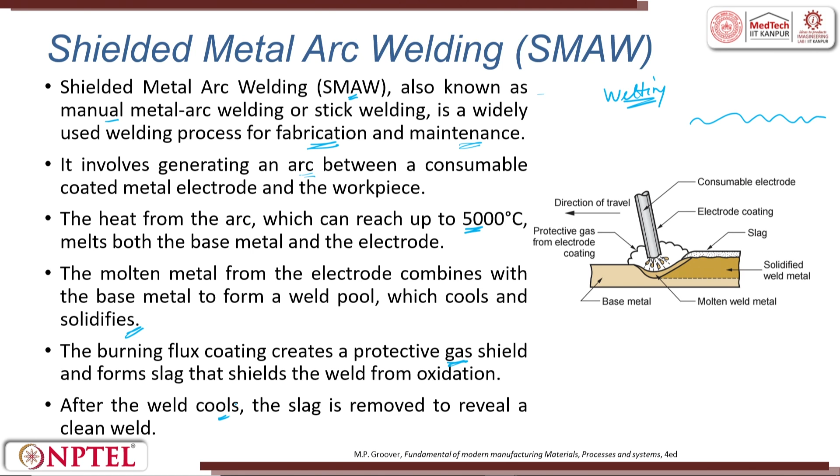A burning flux coating creates a protecting shield, as I said, and forms a slag around the weld. After the weld cools, the slag is chipped off by a hammer.

We have seen this in the beginning, touch start. The arc initiation involves starting the arc between the electrode and the workpiece. Two methods are commonly used. Touch start, as I told you - you touch it and start, then you pull it up.

The electrode is briefly touched to the workpiece, very briefly, for a second, causing a short circuit. The first moment you touch, there is a short circuit, and once there is a short circuit, there is a heat phenomena that raises the current and temperature at the contact point. Why is that important? Because you wanted to initiate the melting. So you touch it, short circuit, heating happens, melting happens, and now you pull it up.

So now you start doing it. This leads to local melting and vaporization of the electrode and workpiece, generating a free electron that ionizes the air, creates plasma, and initiates the arc. Friends, this is very important. There are two methods here. This is touch start, which is very commonly used.

The other one is high voltage discharge. A high frequency unit introduces high voltage into the weld circuit, creating a strong electric field - a high frequency AC unit with variable frequency drives, where you can take high frequency in kilohertz to create a strong electric field. This high voltage pulse initiates the arc without contaminating the electrode, creating the heat phenomena so the current can flow through easily.

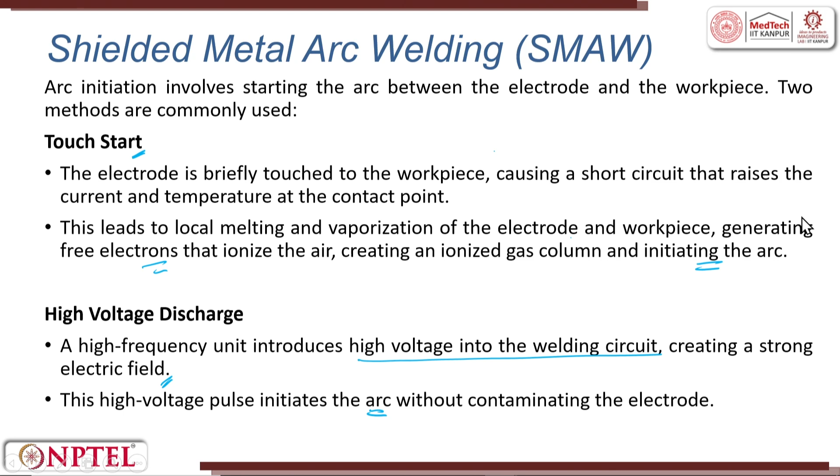The other term is arc crater. This is a small depression formed in the parent metal due to arc penetration, with molten metal piled around it. So you have a small depression, something like this, in the parent metal due to the arc formation, and molten metal piles around it, something like this.

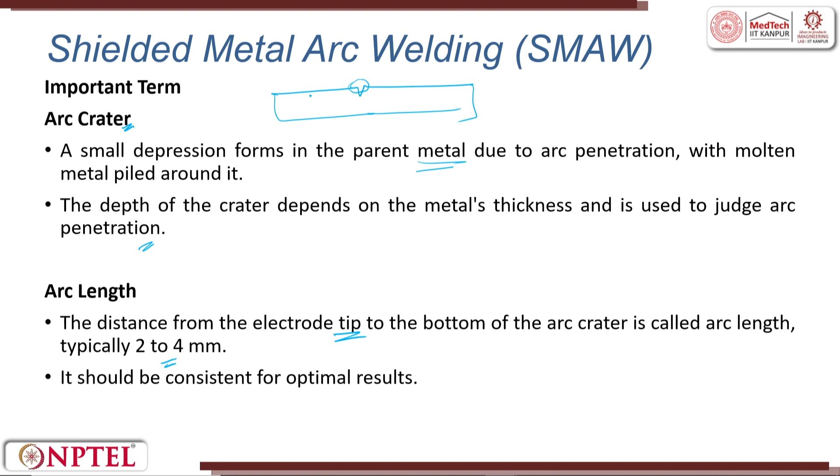The depth of the crater depends upon the metal thickness and is used for judgment of the arc penetration, which is also an important parameter. Arc length we have already seen - the distance between the electrode tip should generally be between 2 mm to 4 mm. Take your scale, 1 centimeter is this much, so 2 mm to 4 mm is too small, right. It should be consistent for optimum results.

The big difference coming in welding when you do manual arc welding is here - consistently maintaining 2 millimeter and 4 millimeter while doing one electrode itself is a challenge. That is why we go for automation. Arc stability.

This shorter length will lead to arc stability. A stable arc, uniform and steady, produces a good weld bead and defect free welding. To maintain the stability, minimum arc variation length is essential. Adding arc stability elements in flux can also help. As seen in the flux example, one is to oxide and the other is arc stability, but predominantly it comes by arc length.

When we talk about polarity, there are two types. When you use DC welding, there is straight polarity and reverse polarity. In straight polarity, the electrode wire you use is negative and the workpiece is positive. In reverse polarity, it is reversed: the workpiece becomes negative and the electrode becomes positive.

In AC, polarity changes periodically within each cycle. It switches as alternating current because it swings positive and negative. This is alternating current, right, so it swings periodically and changes. You can do straight polarity or reverse polarity.

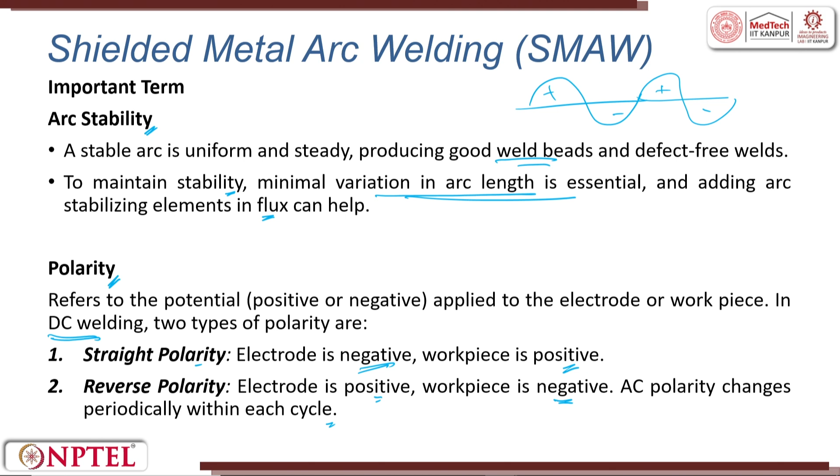Straight polarity has the advantage of deeper penetration. Reverse polarity has the advantage of smearing and spreading without getting deeper. So direct current straight polarity, called DCSP, about 67% of the heat is generated at the workpiece, while the rest is generated at the electrode.

The heating mainly happens because a pool needs to be formed. The electrode need not have very high temperature because the substrate is heavier and has more surface area, leading to more volume, so you need a lot of heat on the base. That is why 67% of the heat gets into the workpiece and 33% into the electrode. Hence bare and medium coated electrodes are used. Deep penetration happens in direct current straight polarity, mostly used for thicker welding joints.

The other way around is direct current reverse polarity. Here 67% of the heat is generated at the electrode, while 33% is given to the workpiece. So when you give heat to the workpiece like this, more melting happens from the surface, creating shallow welding or large surface area welding, which need not give good strength but will give primarily joining only. Hence heavily coated electrodes are used to prevent overheating and melting of electrodes.

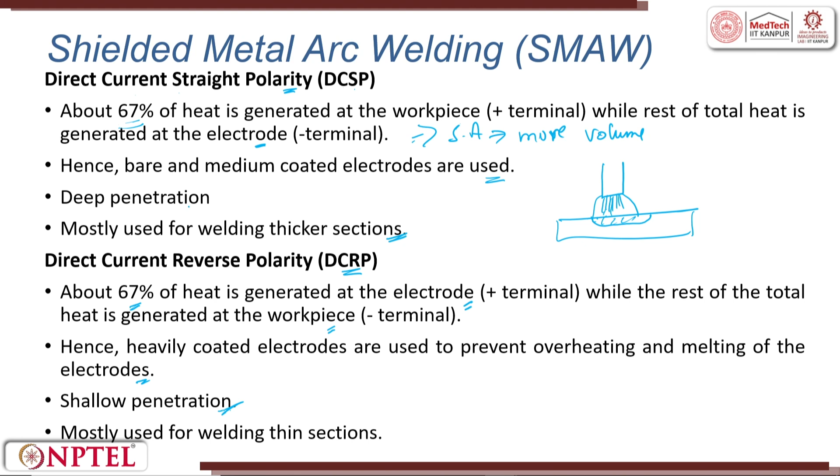So you get shallow penetration versus deep penetration on the surface. Reverse polarity is mostly used for welding thin joints, because in thin joints, if you put very high current, the workpiece itself will melt due to the Joule heating effect, I squared RT. So in that case we try to give maximum heat to the electrode instead. That is what DCRP is used for. DCSP and DCRP are very important, and you should judge whether to go deeper or shallow.

Arc blow: in DC welding, arc blow refers to wandering of the arc due to the magnetic field created by current flowing through the electrode, workpiece, and ground clamp. When there is a very high current flowing, it leads to a magnetic field, and this magnetic field created by the current flow will sometimes disturb the arc.

Once disturbed, the arc, which is a very small thing between the electrode and workpiece, gets affected by this magnetic field, which will not allow the arc to be stabilized and will disturb it. This is called wandering, like a blind man wandering in space. Arc blow refers to wandering of the arc due to the magnetic field, which you did not create yourself; it happens because of the current. Current and magnetic field are linked.

The magnetic field bends the arc from its intended path, especially at the beginning and end of the weld, where the magnetic field concentration is very high. Unlike DC welding, AC welding does not experience arc blow because the polarity changes alternately. So it is a phenomenon more common in DC supply, and we have to be careful.

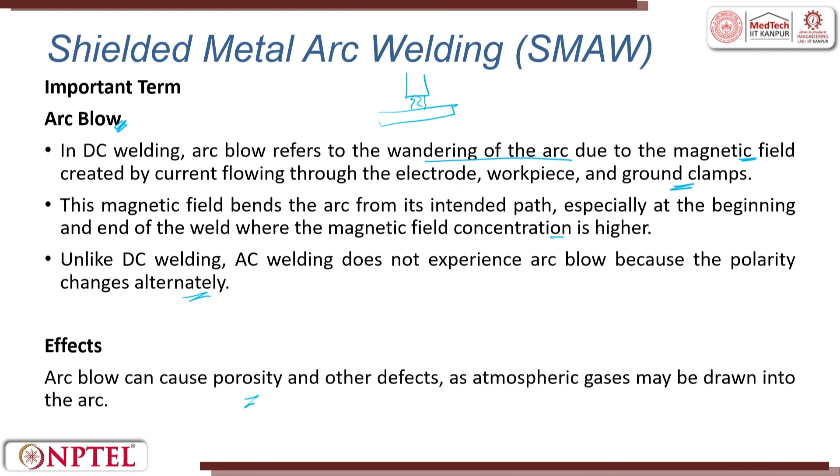So we will try to now look at the advantages and disadvantages. It is simple, low cost, portable, that is why you can use it at any place. It can be used in any position where you want very high weld quality. A variety of electrodes and different materials can be tried.

What is the limitation? The electrode length is a limitation because it depends on the electrode length. Suppose you are halfway through welding and the electrode ends - at that point there will be a discontinuity in the flow of material and solidification. This part would have solidified while this part is yet to solidify because you are manually changing the electrode.

Because of that there can be discontinuity in the material, that leads to cracks. Then it requires cleaning when the new electrode is used, reducing weld speed. Also, controlling is a little difficult compared to metal inert gas welding process, which we will see later.

Where is it used: fabrication, maintenance, repair jobs, shipbuilding, construction industry, gas pipelines - they use manual arc welding. Then buildings, bridges, tanks, boilers, automotive, aircraft - everywhere they use this process because it is easy.

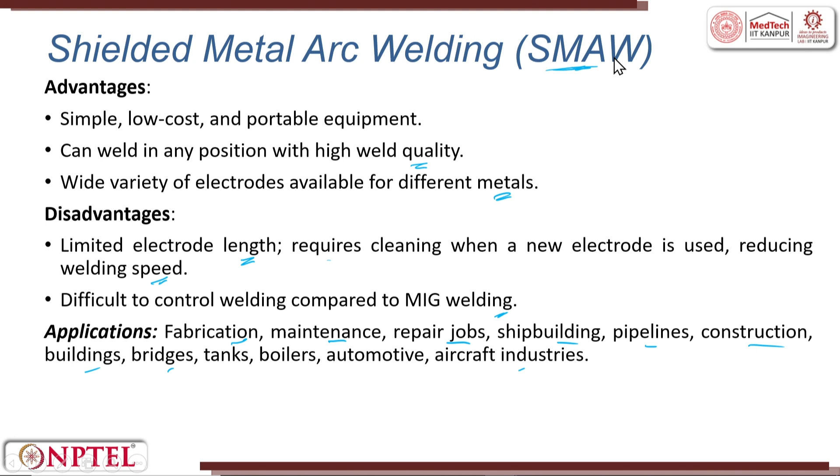If you want to automate it, replace a man by a robot, then you can go with wire feeding. Tungsten inert gas welding, TIG, is also called gas tungsten arc welding process.

Here also there is an arc which is created between the electrode and the workpiece, and the tungsten used as the electrode is not consumable. So we have this base, this is the circuit you hold, there is a shielding gas, and there is a tungsten electrode which is not melting, non-consumable - it does not melt and get deposited.

Second thing, tungsten is too heavy, so if it gets mixed in, it will create a lot of defects in the welding. So the electrodes often contain thorium oxide or zirconium oxide to improve electron emission and arc stability, and allow easy restart at low currents.

So that is the electrode. The filler material is added separately if needed. You can try to heat the base material and join directly, or you can have a filler material in the heated zone which melts and deposits. The filler metal is added separately if needed.

The process is conducted in an inert gas atmosphere so that you do not get any defects on the weld joints - argon, helium, or nitrogen - to prevent contamination of the molten metal pool, with argon being the most commonly used gas due to cost effectiveness and smooth arc action.

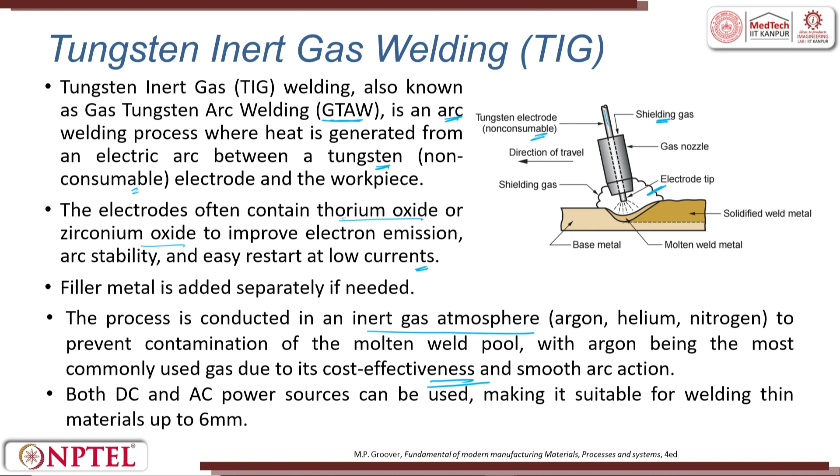Both AC and DC source can be used for the TIG process. So here if you look at it, this is how it is - you have an electrode which is used to create an arc, and then there is a filler rod which flows into the material.

In tungsten inert gas welding, a non-consumable tungsten electrode is mounted in the holder. It need not be heavy, it is one rod and this rod is not consumed, so you do not have to worry about it. Every time, you use one hand to hold the arc and the other to feed the filler, or you can automate the process.

The welding process begins by striking an arc - to generate an arc you have to touch and strike it between the workpiece and the tungsten electrode in the inert atmosphere. You can see here there is an inert gas flowing, the weld gun, and the inert gas flows along with it.

The arc can be initiated either by touching the electrode to a scrap metal piece or by using a high frequency unit, which we saw earlier. Once the arc is initiated, the process continues.

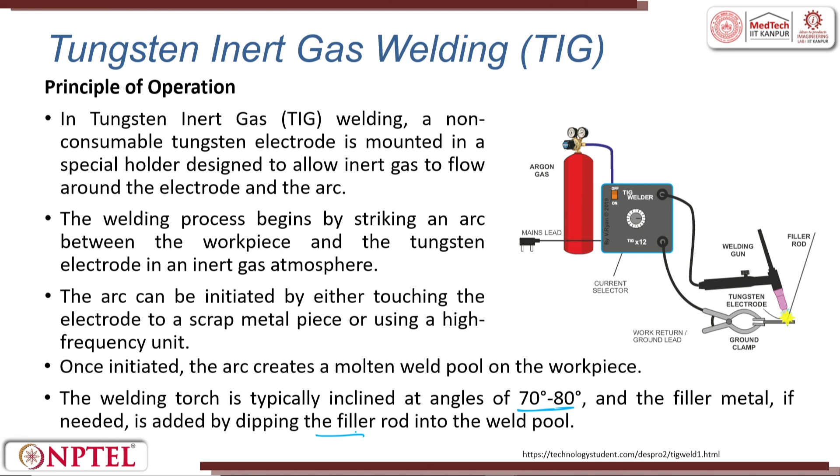The welding torch is inclined at an angle of 70 to 80 degrees, normally 90, but here 70 to 80, because the filler has to come in at an angle. The filler material, if needed, is added by dipping it into the weld pool. As I told you in submerged arc welding, here also you have DCSP and DCRP - this is the same, we do not have to worry about it.

And then we will see a new thing called ACHF, alternating current high frequency. It is used for aluminum and magnesium, where high frequency helps prevent oxides from forming, or oxide cleaning action. If you look at a close microscopic view, you will see the direction of travel happening this way, and a current conductor coming, with shielded gas coming through.

This shielded gas protects, this is the inert atmosphere which protects. There is an electrode which comes in contact with the workpiece to create an arc. There is a filler material, which can have a coating or come bare. So this is the microscopic view of the process, showing the non-consumable tungsten electrode, gas shielding fed around it, the arc, and the filler material.

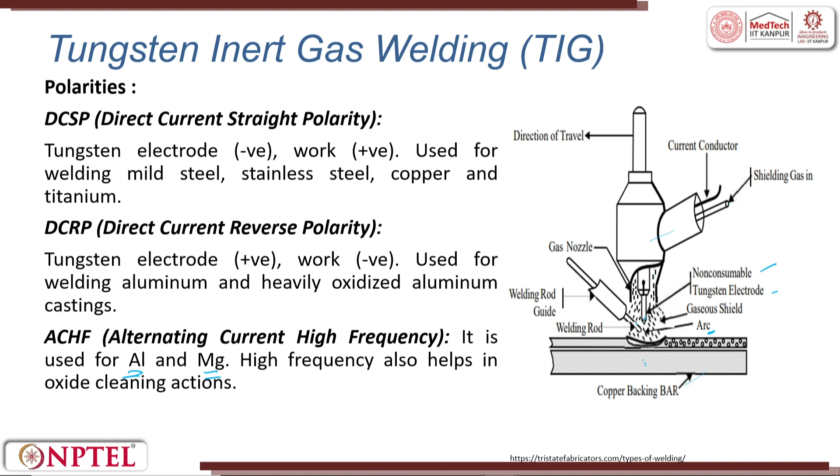Advantages and disadvantages are straightforward. It can be used for thin materials, both ferrous and non-ferrous can be done. It provides very clear visibility of the arc and workpiece. Stainless steel, mild steel to stainless steel can be welded, and dissimilar materials also can be done. Since it is exactly focused, the heat affected zone is less compared to manual arc welding.

TIG is slower than MIG - TIG is tungsten inert gas, MIG is metal inert gas, and it is prone to contamination. The tungsten is the same thing, tungsten is used there, replaced by metal in MIG. So tungsten contamination can cause brittleness. Suppose the tungsten melts, it is very heavy, so it will fall down and create a brittle weld.

So it is costly. For applications, you can see non-ferrous materials - majority of them we use TIG process to weld aluminum, magnesium, copper, nickel, titanium. All the aerospace and automobile industries use magnesium and titanium, and we use only TIG process for those. Zirconium and hard surfacing alloys we use TIG for as well.

Welding of expansion bellows, which give you a cushioning effect - bellows, transistor casing, TIG. Instrument diaphragm, thin instrument diaphragm joining, TIG. Seal joints, TIG. Welding sheet metal and thin sections, TIG. So you should now understand, for non-ferrous thin materials, TIG is used.

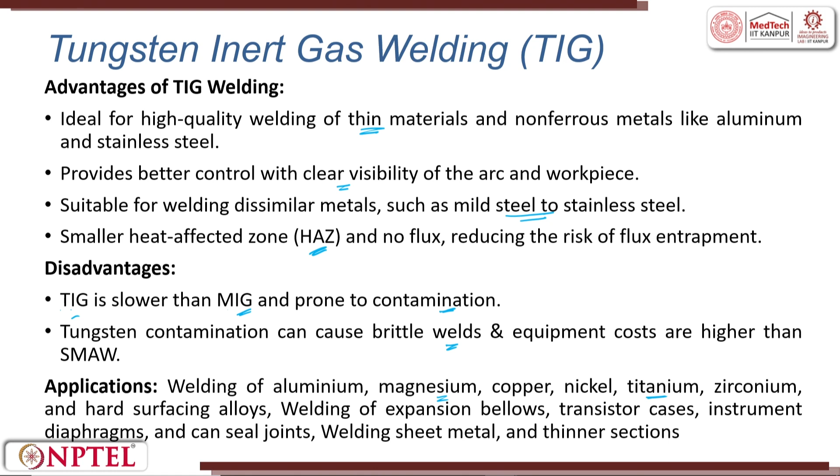When it is a heavy structure, it is going to be the arc welding process. So a small difference between TIG and MIG - MIG is metal inert gas. Gas metal arc welding or MIG welding uses an arc to create a coalescence between a continuously fed metal electrode and the job. Now you see the difference - continuously fed metal electrode.

In TIG, a tungsten electrode comes, and filler comes which you try to melt. But in MIG, the metal itself comes, fed from the spool. So you have this nozzle where the shielded gas is, and you can have this metal. The process is shielded by inert gas such as argon, helium, carbon dioxide, and does not require flux.

This is very important - the process is shielded by inert gas which does not require flux. Here the metal melts and drops down. So in MIG, a consumable metal wire is used. We can try to use either DCSP or DCRP.

Generally we use RP for stable arc and efficient metal deposition. The arc length gap is between 1.5 to 4 millimeters, and the torch remains at 10 plus or minus 2 millimeters from the workpiece with an arc length of this much. So the arc length is maintained constant such that you can get the best welding joints.

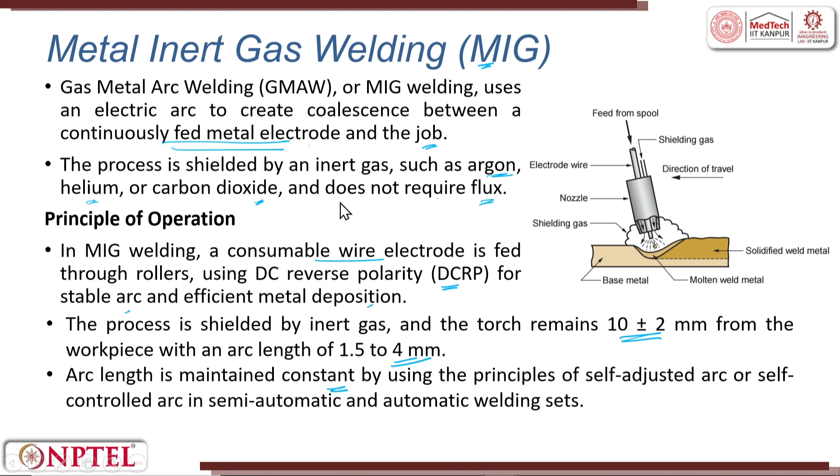There are self-adjusting arcs and self-controlled arcs - two types of arc possible in the metal inert gas welding process. The electrode feed adjusts automatically, which is called self-adjusted arc. If you look into it friends, almost everything comes down to arc length, arc. Arc is nothing but flow of current. So if you can control the current flowing, or control the voltage flowing, and sense it properly, you can help in feeding the electrode accordingly.

Suppose if the arc length is too short, then what happens? You have to feed faster, so you can do it. In welding, it is interesting that you can control the process very nicely. The electrode feed adjusts automatically - decreased arc length increases current, increased arc length decreases current. Now you can see how beautifully it is doing this.

So you closely watch the animation which is here, you will understand. This requires a power source with flat characteristics - as I told you, constant voltage or constant current, you can also do it. Self-controlled arc - the electrode feed rate adjusts with motor speed.

Decrease arc length decreases the motor speed, and vice versa. It requires a power source with drooping characteristics. We will try to see flat characteristics and drooping characteristics later. Is that clear? So you can have two of this.

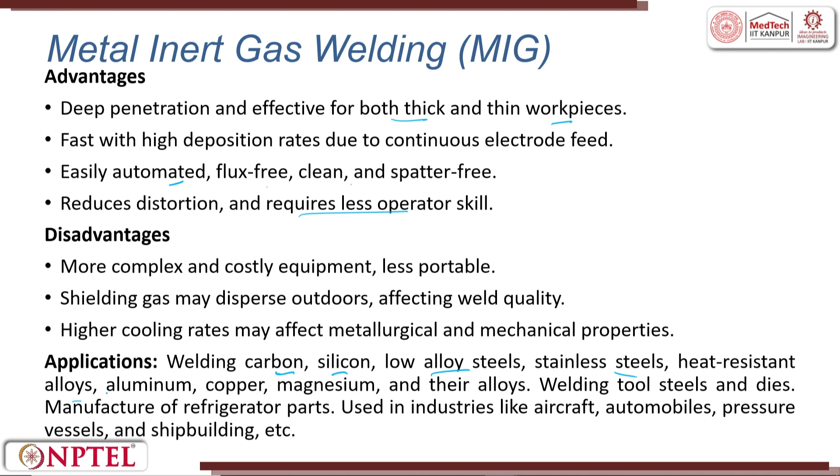It reduces distortion and requires less operator skill, because majority of them you can control by these two processes: one is self adjusting arc, the other self controlled arc. Disadvantages are straightforward. Applications include welding carbon, silicon, low alloy, stainless steel, heat resistance alloy, all these are possible by MIG. Compared to manual arc, MIG can be chosen, but manual arc still has its own advantage. So MIG and TIG, I am just comparing, so that you will appreciate the differences.

TIG uses a permanent non-consumable electrode. In MIG we use metal, which is a copper wire, stainless steel wire, or mild steel raw wire. Consumable metallic electrodes are used in this process. Filler metal may or may not be used in TIG, because you heat it and join, so you do not need a filler.

In MIG welding a wire is used. The penetration is not as deep as compared to MIG overall. Here both AC and DC can be used, but in MIG only DC can be used. TIG thickness can be limited to 6, whereas here thick and thin can be done, going up to 40. Electrode feed is not required in case of TIG, but here it is required.

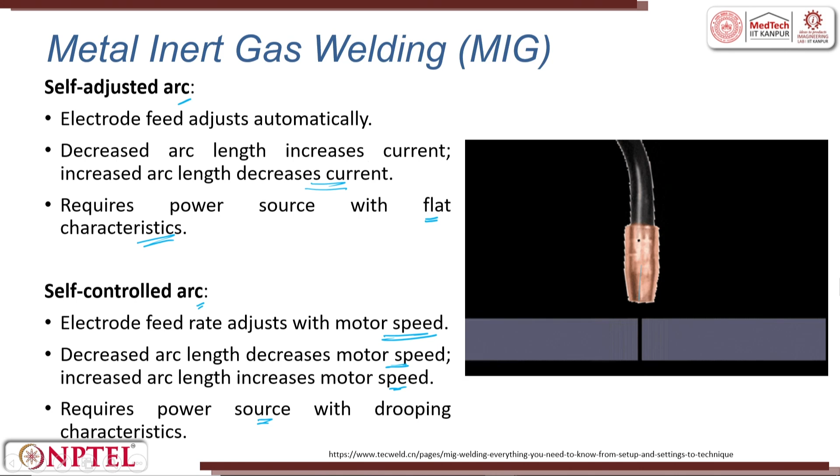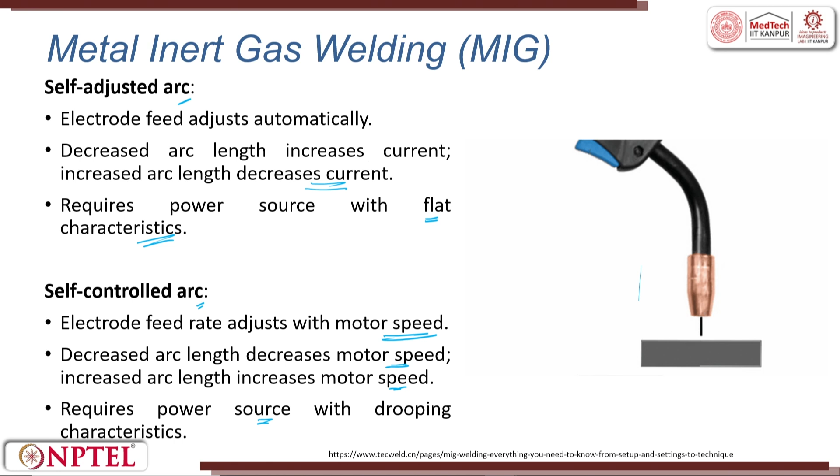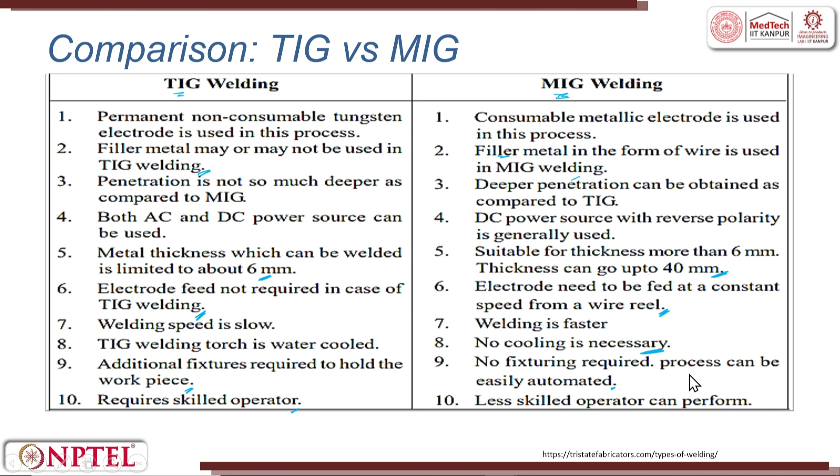That is why you saw these two, self adjusting arc and self controlled arc. The electrode feed can be adjusted with the motor speed, with the arc speed. Weld speed is slightly lower in TIG, higher in MIG. The TIG welding torch is water cooled, here there is no cooling required. Additional fixtures are required to hold the workpiece because heat will cause distortion. TIG requires high skill, MIG requires not much high skill. This clearly distinguishes when to go for MIG and when to go for TIG, but the commonality is the inert gas flowing around it.

Next let us look into plasma arc welding process. Plasma arc welding uses a constricted arc between a tungsten electrode and a nozzle or the workpiece. What they are trying to do is show between the tungsten electrode and the nozzle, the circuit can be closed by creating these two and creating a plasma, or this is the workpiece. You can try to have a circuit closure between tungsten and the workpiece.

It employs two inert gases, one for forming the arc plasma, the other for shielding it. Two separate entities are used in plasma, first to create, then to shield. Filler metal may or may not be added, and pressures are typically not used. It is almost like TIG; if you want, you try to add a filler if necessary. Here the arc is created and the heat is generated. In the heat zone you can keep a filler if you want, otherwise you can melt the material and then join.

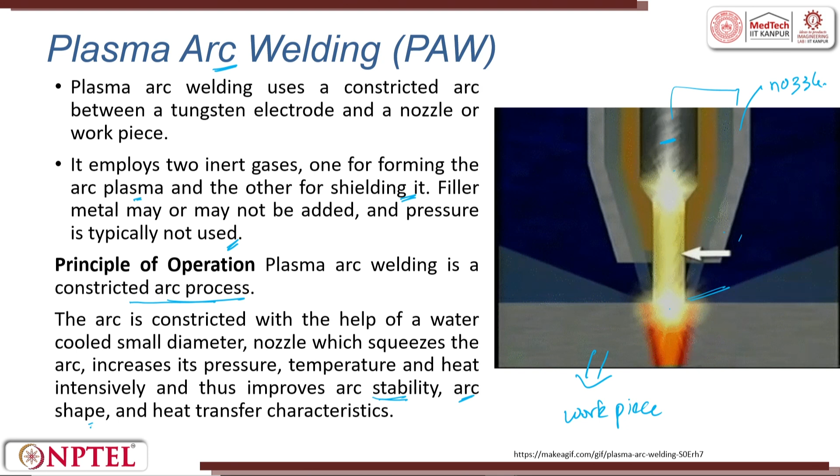Principle of operation: plasma arc welding is a constricted arc process. The arc is constricted with the help of a water cooled small diameter nozzle which squeezes the arc, increases its pressure, temperature and heat intensity, and thus improves arc stability, arc shape and heat transfer characteristics, compared to TIG, MIG and submerged arc welding. Arc stability is very high, arc shape is good and heat transfer is highly efficient.

In plasma there are two types of arc processes: one is non-transferable, the other is transferable. In the transferable type, between the electrode and the workpiece there is a flame, a heat flame which is a plasma that is created. The arc forms between the electrode and the workpiece.

It has very high density and the plasma jet velocity is also very high. It is used for high heat application.

The same thing when you have non-transferable, it is between the electrode and the nozzle itself. So the plasma is created between these, and this is the arc which is getting created. So now the arc is formed between the electrode and the water cooled nozzle. So plasma exits as a flame independent of the workpiece.

So the workpiece can be conducting or non-conducting, used for ceramic and metal plating with low energy densities, you can use non-transferable arc. If you use a highly insulating material and want to join, you can do it by plasma. Here again you can have a filler, or you do not have a filler. So transferable, higher end, high velocity, it comes and hits.

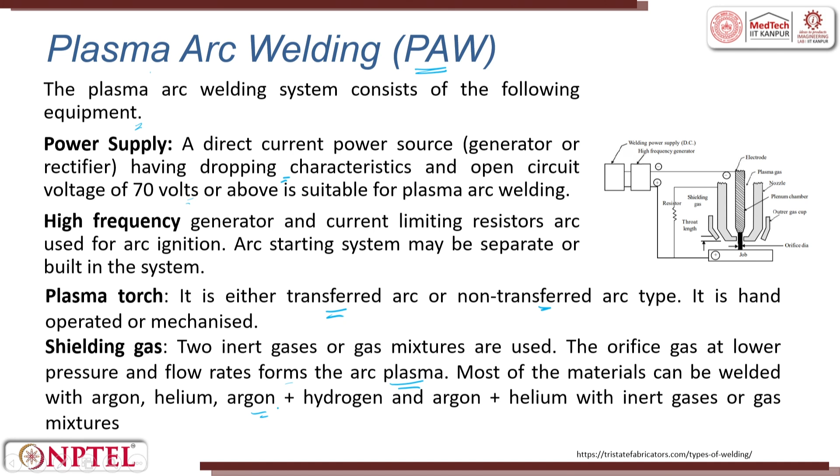We try to use it for creating plasma and we try to use shielding gas. So inert gas or a gas mixture is used. The orifice gas at a lower pressure and flow rate forms the arc plasma, and the protection will be at a higher pressure. So you play with the flow velocity and then you try to do it.

So again the advantages and disadvantages are clear. Now we will only look at the applications here. It is used for welding high performance alloys, for example cryogenic, aerospace and corrosion resistance welding processes. Corrosion resistant material it can do. For cryogenic also material it is used, where we talk about -30, -40, it is used.

So it is used for stainless steel, the plasma torch for spraying, welding, cutting, it also can be used. So the moment you transform this, you try to use this alone, it can be used for cutting because you have a high heat.

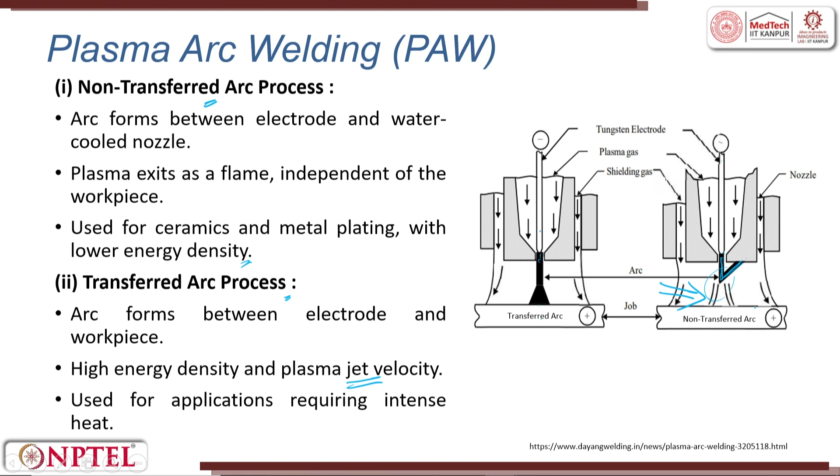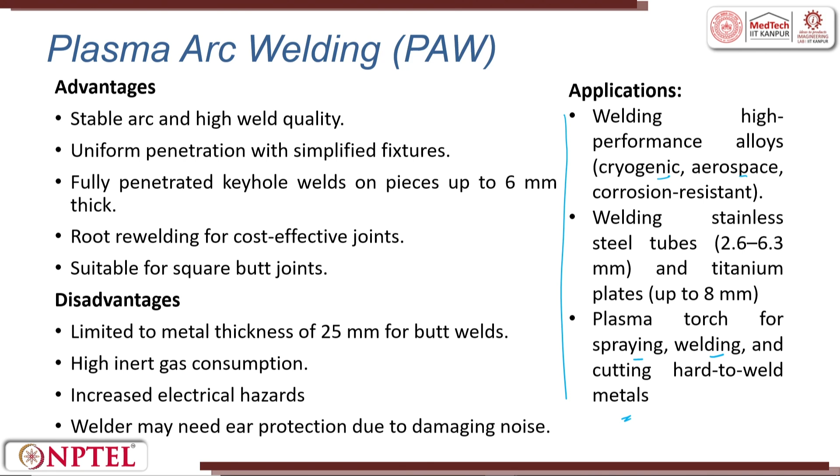You can use it for joining, and in between, for the non-transferable, I fill a powder, so then this powder can be used for spraying, so plasma spraying is possible. That's what I have told you. So plasma torch for spraying, you feed a powder. Then for welding, you keep a rod. Then if you don't put this and that, you just use it as a flame heat source, it can be used for cutting. So all are possible by the plasma welding process.

Next, let us look into submerged arc welding process. This is used exhaustively in heavy engineering applications. In submerged arc welding process, an arc is formed between the metal electrode and the workpiece submerged under flux.

Large electrodes up to 12 millimeters can be used, and currents like 4000 amps can be used. So the rate of deposition can go up to 20 kgs per hour. The speed can go up to 5 meters per minute. The thickness which can be welded can be up to 75 millimeters in one pass. So this is the submerged arc welding process.

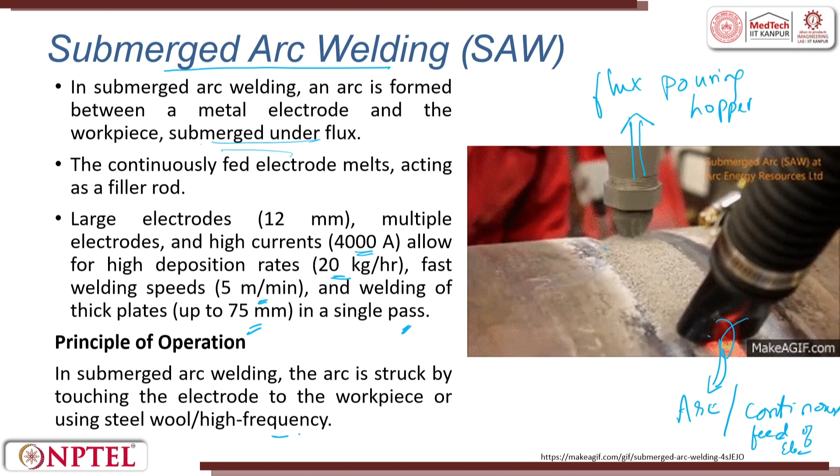So the principle is the submerged arc welding. The arc is struck by touching the electrode to the workpiece, and then the spool is fed, and then you start doing the process. So this gives more clarity. The flux is fed first, then there is an electrode which is continuously fed.

So you can try to go through it. Once the weld is done, you will have slag. After the weld is over, we try to use the chipping hammer to remove the unwanted slag which is there, and the weld zone forms, right.

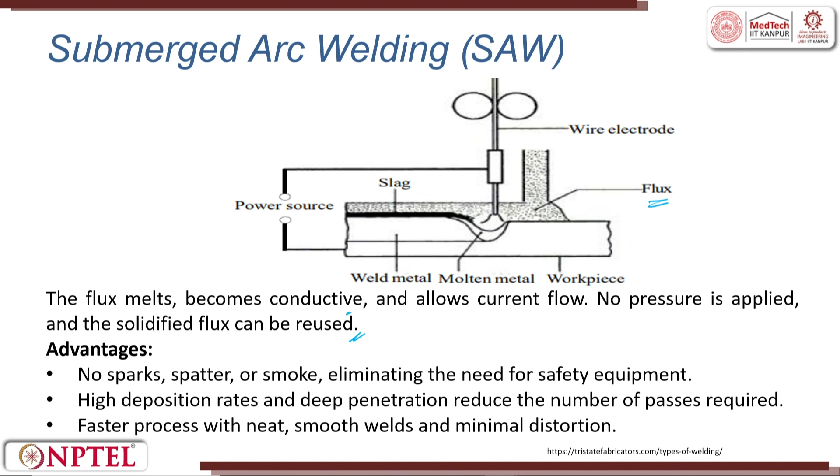So the advantages are that spatter and all will not be there. It will be a clean joint and you get a heavy thick metal welding happening. So these are some of the advantages and disadvantages.

You can see the applications: bridge girders can be used, water pipelines, railway structures can be done. Nuclear industry also uses the submerged arc welding process. It is ideal for mass production in steel sections.

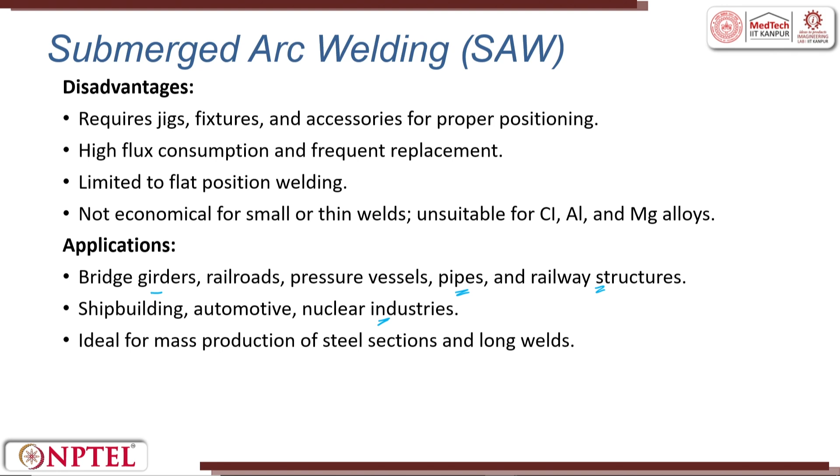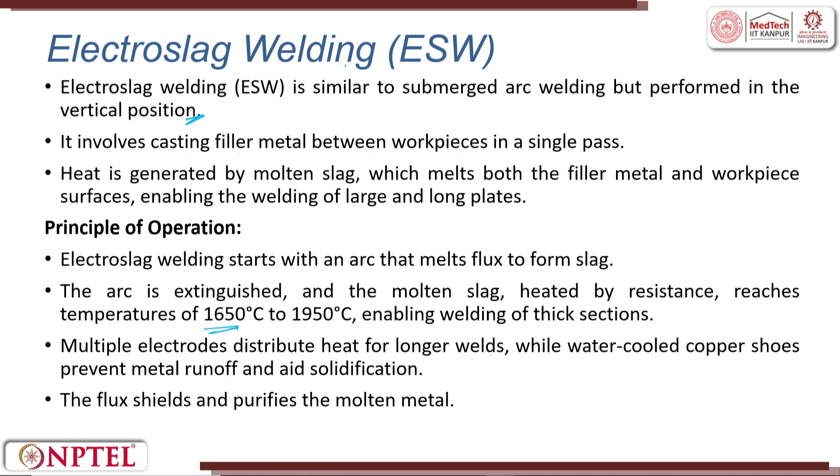Electro slag welding starts with an arc, same. The temperatures go up to 1650 to 1950. Multiple electrodes distribute heat for longer weldings. Water cooling is used and flux shielding is also tried. So this is how the electro slag welding process works.

In electro slag welding, what happens is you have to go from bottom to top. A very thick joint has to happen, so we continuously feed it. Earlier I said a ring will be rotated; here it will go vertically to the top, right?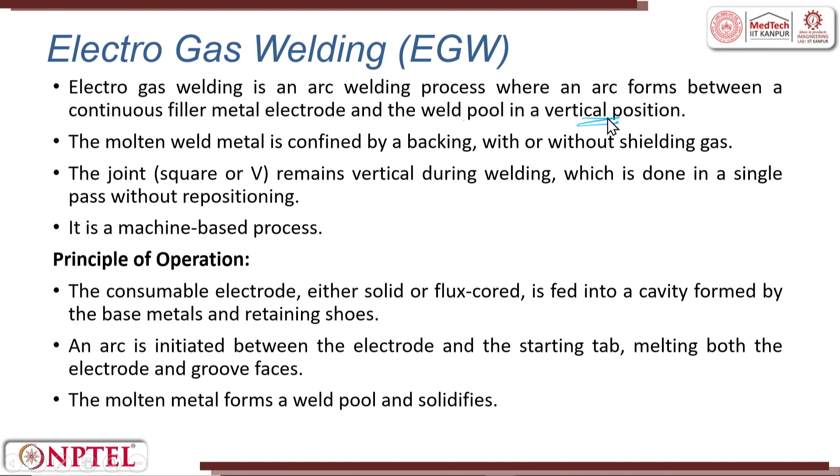So that's electro slag welding. Now we will see electro gas welding. Electro gas welding is an arc welding process where the arc forms between continuously fed filler metal electrodes and the weld pool in the vertical position. Rest of the process is the same. So you have it like this, which is called electro gas welding process.

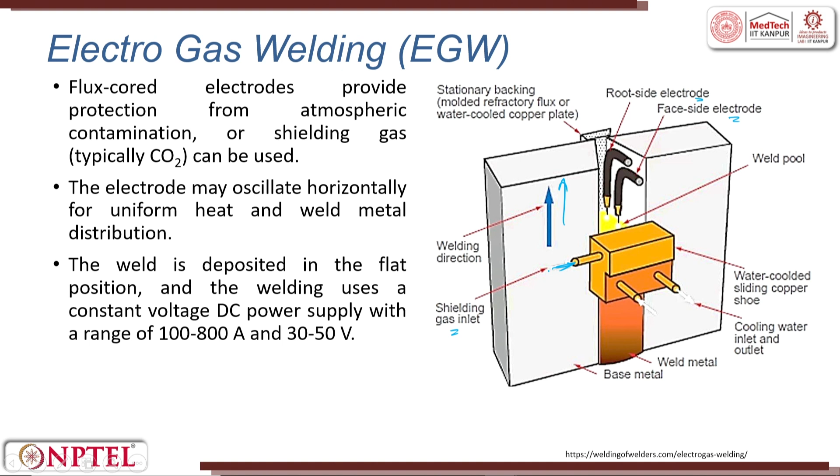So we saw in this lecture various fusion welding processes: metal arc welding, submerged arc welding, tungsten inert gas welding, metal inert gas welding. We also saw welding can happen in horizontal and vertical directions. We saw electro slag and electro gas welding processes.

So I am left with one question for you. Throughout my lecture, I said reverse polarity and forward polarity. I have also told you the difference. So now look at it, where can be the application for reverse polarity and forward polarity in real time.

This will be one assignment. The second assignment is going to be why steel, mild steel, is always used with AC welding, whereas for non-ferrous material we always use DC. A second question that you should ponder.

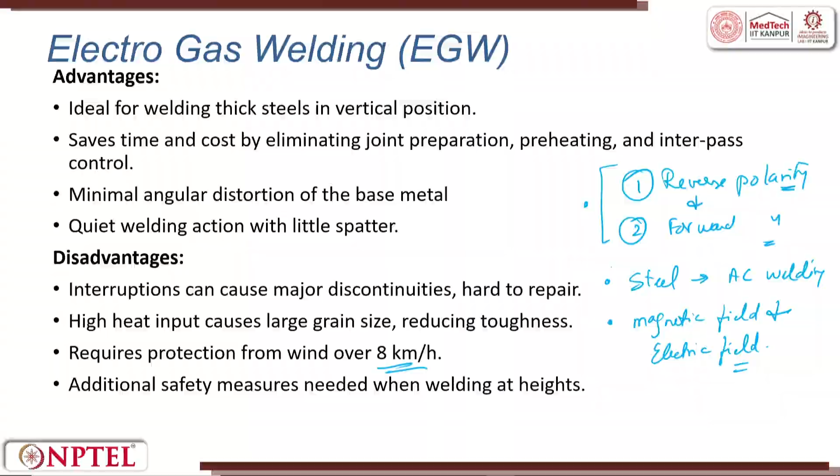These are three things which you can always look into, read, look at many of the references which are there, and then try to educate yourself. Please have a look at this and then we will continue in the next lecture. I will also try to talk about the drooping curve and other characteristics in the next lecture.